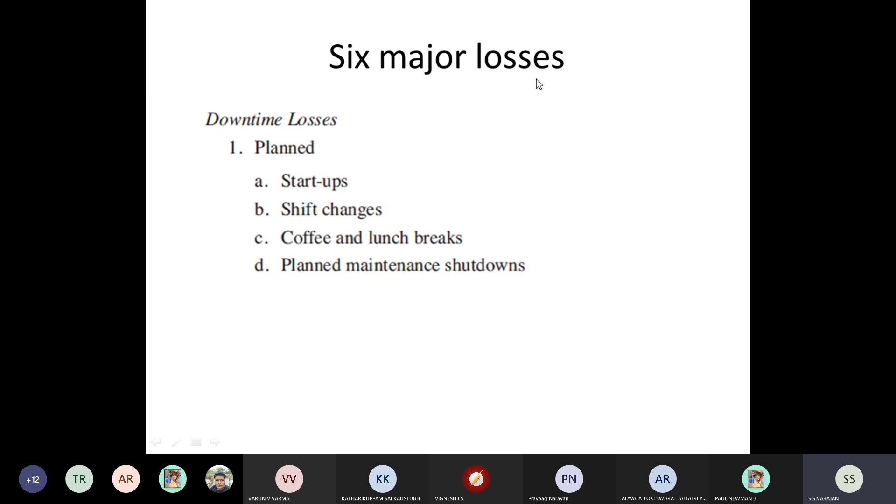And the second one is unplanned downtime. So the equipment has a breakdown; it is unplanned. Then changeover, or material is not available - this is a common problem in industry. Machine will be there, worker will be there, but sometimes material will not be available, so the machine has to be idle. This is unplanned downtime. So these 2 classes come under availability. There is a total time, and these losses have to be subtracted, so we can find out the percentage of available time. That's what we are going to see in the problem.

So total time will be there. You know what the total time is, and then you subtract all the downtime. You will get the time available, and that divided by total time will give the availability.

And then reduced speed losses. There are some reasons - idling and minor stoppages will be there for different reasons, and also slowdown. For example, take a bus - normally the bus cannot run at maximum speed, because of vibration. Deliberately, the driver will drive the bus at a lower speed just to avoid vibration. This is called performance efficiency - anything, we cannot go for 100%. Even in case of the lathe, whatever we have in lab, the maximum speed is around 1500 RPM. We never go for that because of vibration and other issues. So always around 90%.

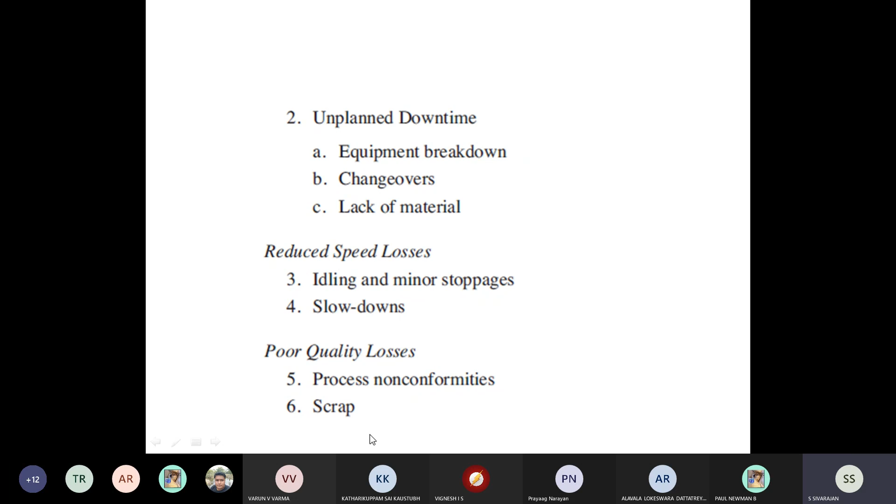Downtime losses are measured by equipment availability. Availability is given by the operating time, which is planned time minus downtime. So that example I did, planned time, we subtract the downtime, you get the operating time. That divided by the planned operating time will give the availability.

Basically, for some time the machine is available. For an 8-hour shift, for example, we are running for 5 days. Into it, 40 hours is available. In downtime, some minutes or some hours will be there. So you subtract them, that is going to be the operating time. That you divide by the planned operating time, then you will get the availability. And usually the number will be 80%, 75%.

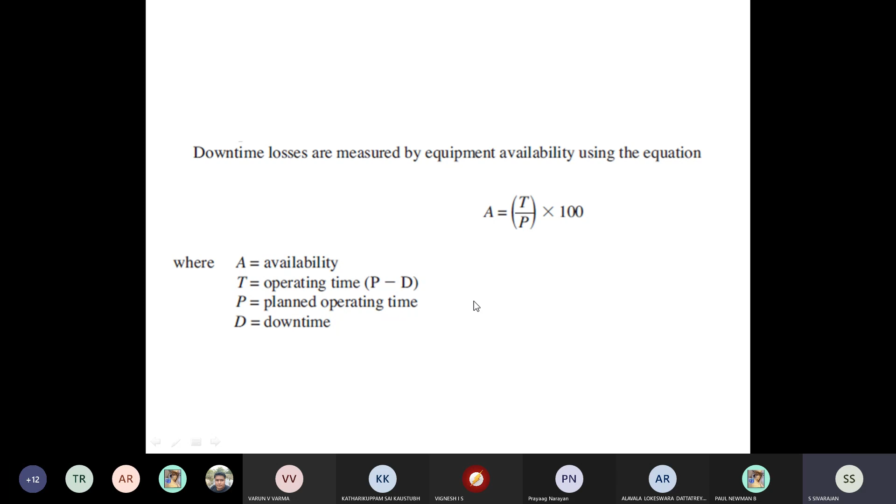So we should aim for 95%. Of course, overall equipment effectiveness, we have to aim for 85%. And you know very well, 100% is very ideal, not possible, because even planned maintenance, planned downtime is there.

Reduced speed losses are measured by tracking the performance efficiency using the equation. E is efficiency, performance efficiency, which is equal to C into N by T, where C is the theoretical cycle time. So cycle time is not the actual machining time.

Cycle time is nothing but the time required to make a product. What you know, in 1 hour, how many products you can make. So that's for an individual product. So that is called theoretical cycle time.

That you multiply by the processed amount, total quantity what you are making, and then you divide it. This numerator is going to be time, because cycle time is in minutes. N is a quantity, that is a number. You multiply them, you will get minutes. And this T is nothing but the planned time, planned operating time, which we have seen in the previous step. So that is also in minutes. So you will get efficiency as a number.

Normally this has to be around 90%. 90% is a good number. 90 to 95 is a good number. And the third comes the rate of quality products. R means rate, E means efficiency.

Poor quality losses are measured by tracking them. The quality losses are measured by tracking the rate of quality products. This is very straightforward. The processed amount is N. Q is non-conformity, that means defects. So N minus Q divided by N will give the rate of quality products.

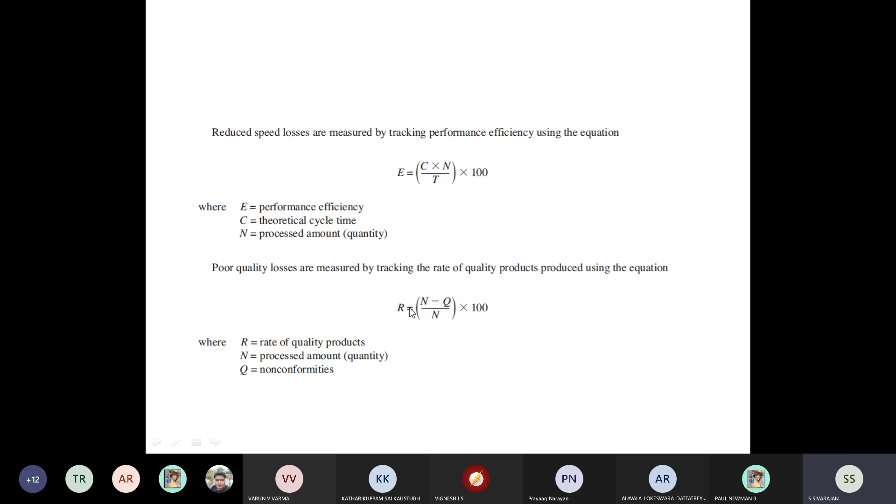N is the total number, Q is the defects. So you will get what you call non-defective products in the numerator. N is the total products. So that will give the rate of quality products.

And equipment effectiveness, some of the textbooks use the word OEE, overall equipment effectiveness, which is given by A multiplied by E multiplied by R, where A is the availability, E is the performance efficiency, and R is the rate of quality products. And this target should be 85%.

Typically, we have to aim for 85%. And as I told you, you cannot go for 100. Everywhere, some defects will be there. Performance 100%, some speed losses will be there. And availability, sometimes the equipment will not be available. So 85% is the target.

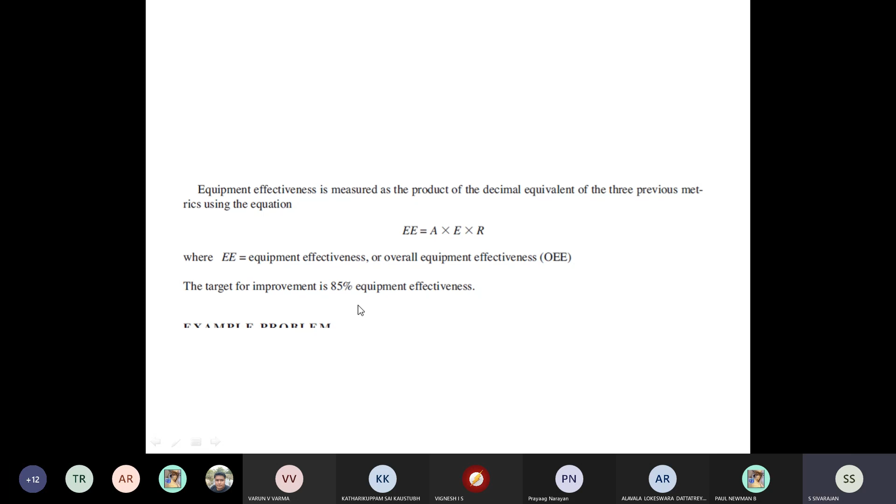Your target should be 85%. And all the maintenance programs, whatever you are planning, whatever goals you set, you should try to aim for that. When you implement all the TPM techniques, it should come around 85%.

So now this is an example. 10 hours per day, and we are having 5 days per week. Everything we are going to do for a week. Theoretical cycle time is given. Production N is given. Production 4,450 is given. Defective parts is given as 15.

First, the planned time. Planned time is given by whatever time. So how do you get this 3,000? 10 hours a day into 5 days, into 60 minutes, we are multiplying by 60. So 10 into 5 into 60. This is because all the downtime is given in minutes.

There are two downtime minutes. One is due to manufacturing, other is due to maintenance. Last class we have discussed this.

410 plus 227, you can add them to get 637 minutes - the machine is not available, the equipment is not available. Whereas the total minutes is 3,000. So how do you get that? 10 hours a day, 5 days a week, 60 minutes per hour.

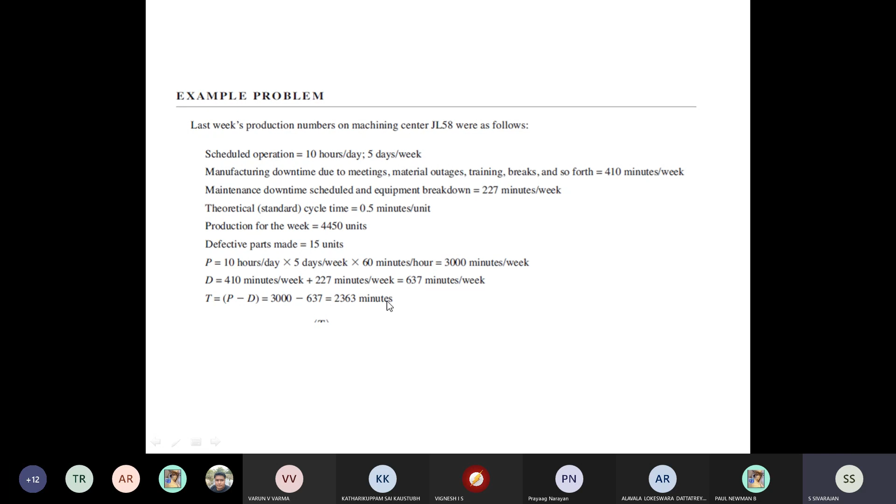So we are getting 3000 minutes per week, and the downtime is 637 minutes. So you subtract this 3000, we subtract the 637, you get 2363. That you divide by 3000. 2363 divided by 3000 will give the availability. So the total time is 3000 minutes, and the downtime 637 we are subtracting, so we are getting 2363. That divided by the total time will give the availability.

So A is 78.8%. The next is E, which is the cycle time. The cycle time is 0.5 minutes per product, and then the total number - we are making 4,450 products. So 4,450 into 0.5, this numerator is in minutes. The cycle time for one product is always 0.5 minutes. That you multiply by the total quantity what you are producing, which is 4,450, divided by the time, will give the efficiency. So this is ideal - theoretically 0.5 into this much minutes it must take, but actually due to the availability it is only this much, so the efficiency is 94.2%.

Next, R is the rate of quality products. So rate of quality products is nothing but number of products we are making minus Q, which is defects or non-conformity, divided by N. So 4,450 minus 15 is the defects, divided by 4,450, which is 99.7% - the rate of quality products.

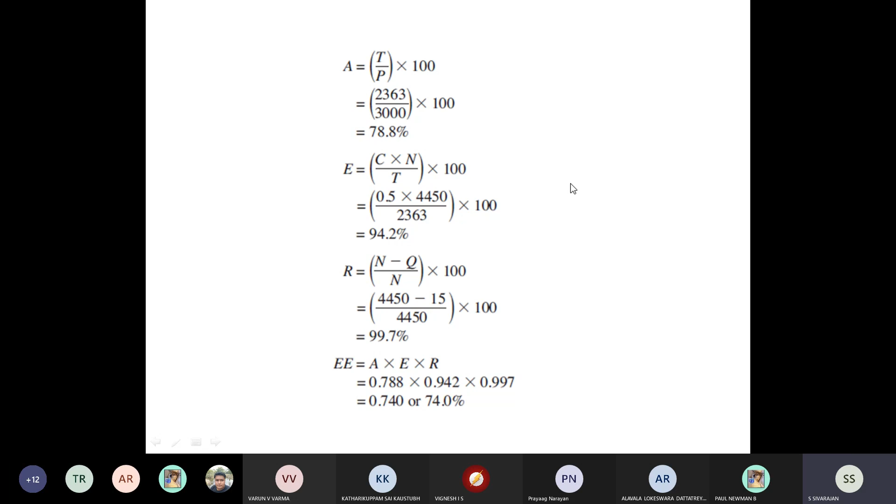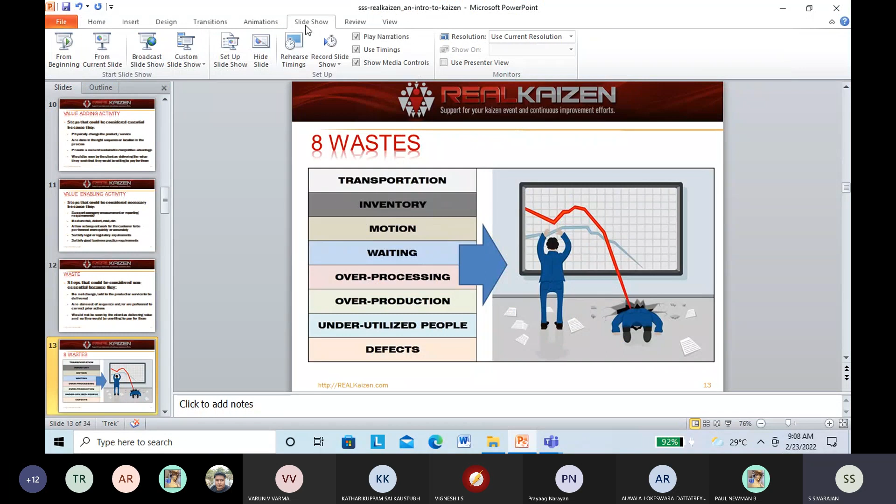Now we'll go to the next chapter, Kaizen. This is a Japanese concept. We have in the syllabus Kaizen and 5S. We will try to cover this in this lecture.

So what is Kaizen? In Japanese, Kai means change and Zen means good, so Kaizen means good change. The main idea of Kaizen is to make a small change - only thing is it should be a good change, and it should be for better, and it should be a continuous improvement. Small thing is what we are doing.

For example, in this class, I want to improve it - some small thing I should do, for example, teaching something over and above the syllabus. An example of Kaizen I gave was when I was working in some other college - they asked me to give some Kaizen, some improvement. So what I told them is, I am going to teach one topic which is over and above the syllabus for this subject. That is going to be a good change, a small improvement - something not there in the syllabus that I am trying to teach students so that they will be benefited.

So like that - Kai means change, and it should be for good, and small, and it will not be great - suddenly overnight, nothing, dramatic improvement will not be there. For example, in the last class, last 5 minutes, we have seen the equipment effectiveness is around 75%. Overnight, within 10 days, you cannot make it 85%. It's going to gradually improve - some small incremental changes we have to plan, and then we have to make it better.

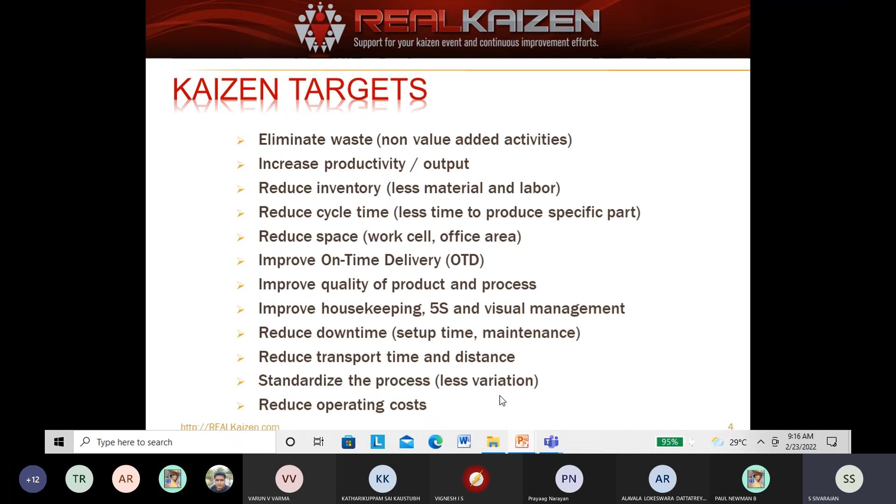When we are doing the plant layout, we have to be very careful so that material handling is minimum. Of course, the material handling has to be done from one machine to another. Somewhere the component has to move, some material handling is required. So you try to reduce the time, standardize the process. Variation, that was TPM, variation should be less. Operating cost should be reduced.

So try to make all the improvements. These are all some of the ground rules. Don't accept excuses, just say no to 'we have always done it this way.' Think of how it can be done, not why it won't work. Don't make excuses. Ask why 5 times until you get the root cause of the problem.

So this is what we have seen in the cause and effect diagram. There is something called root cause analysis also. What is the root cause of the problem? We have to find out. So 5 Why, I think this is also available on the net. Why analysis - team solution is the best solution.

Don't seek perfection, that's what very important. Even nowadays this generation always seeks perfection the first time. That is also not right. So many times, ideally we cannot do it perfectly. It will take some time, then only we can attain perfection.

Every person has a voice, and there is no such thing as a dumb question. Keep a positive attitude, respect everyone. So these are all some rules. When you do Kaizen, these are some of the ground rules that have to be followed.

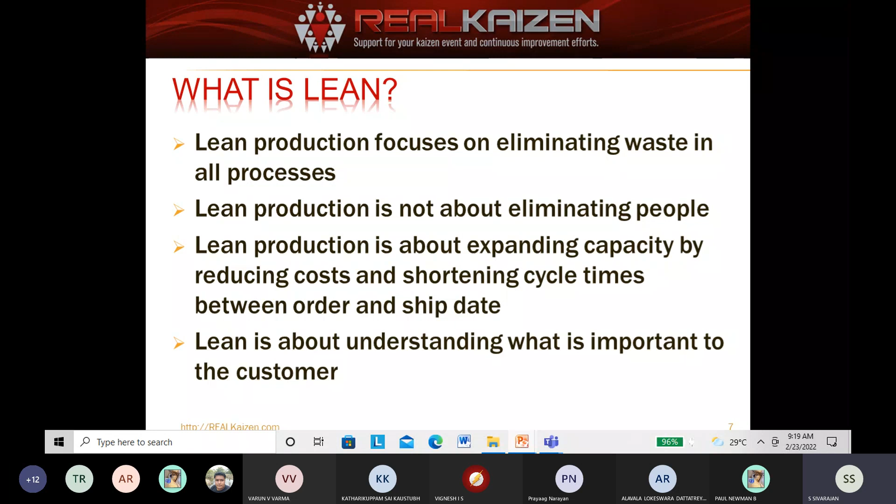And once again, coming to value-added activity and non-value-added activity. So what is a value-added activity? An activity that transforms or shapes the product - any manufacturing process that is altering the geometry.

For example, if you take casting, you are melting the metal and then pouring it into a cavity which is called a mold, which will have the shape. For example, if you want to make a piston, you make the cavity of the desired shape, piston shape, and then you pour the molten metal and let it solidify. So we are altering the geometry - an activity that transforms the shape. So casting is a value-added activity, or information to meet the customer requirement.

So if the customer asks for something, then that is a value-added activity. Value-added is always determined from the customer's perspective. That is going to be very important - that is what total quality management, TQM, is all about. From the customer's point of view, we have to see whether value addition is there.

I will give an example. If you go to a restaurant, customers will normally see that the surroundings are very important - that is a value addition. So you provide music, or your interior decoration should be very good.

Because at the restaurant, they will be waiting for some time before they get their dishes. So many times, for the customers, you should provide music, ventilation should be there, lighting should be proper. If it is night, lighting should be proper. These are all things you have to take care of, but that is not the basic service. The basic service is the taste of the dosa or idli, whatever you are getting. But from the customer perspective, during the waiting time, you should be comfortable. So that is value addition, that is also value addition.